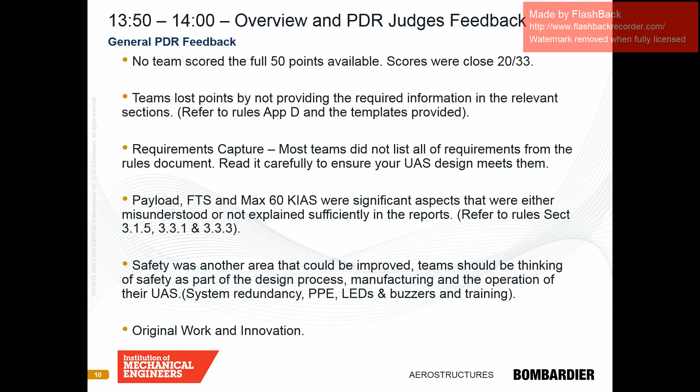Okay, that I think is everything on the PDR. I'll just go straight on to the CDR, and then we can do some Q&A after that. So, right, the CDR. Now this is a longer document.

As you will have heard this morning, those of you in Belfast, these reviews, this is what you should be doing, is the review. What you're trying to do is say, here's my set of requirements. I've now looked at these, and in your PDR, it was your first. Let's stop for a moment. Let's see, am I meeting the requirements? Is my design likely to be successful? And when you get to the critical design review, this is now where you're saying, right, I've now completed my design. I will check this against all the requirements, what I'm trying to achieve, and is that right? And if it's not, I'll go back and redesign that bit.

And only then, once I've satisfied myself that this review is complete, I can then go on into production and build the product. And so you need to think in that mindset. And what we as judges are trying to look at is that you have done just that. That's what we're interested in seeing. You've looked at the requirements, you've satisfied yourself this product is going to be fit for being built, and in our case, just doing a single fly-off event.

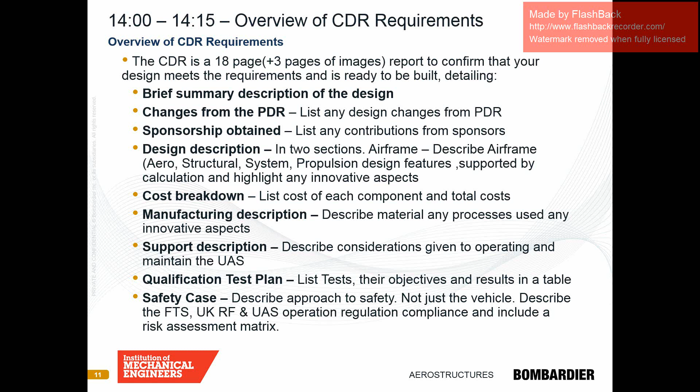I think, is that all we've got to see here? Oh yes, no, we've got one more slide. So, yes, just some points.

Please take note of the feedback we gave you on your PDR. It may be that we just misunderstood your PDR, and you might not like the feedback we gave you. If we misunderstood the PDR, well, write it more clearly this time. But please respond to what we wrote, because there was a reason for it. I know in one particular case we just misread the submission, and one team did challenge us on a statement, and we agreed. So again, in your CDR, when we give you feedback, don't be frightened. We're not going to penalise you if you challenge us. We're only human, and we don't always read properly either.

But on the feedback from the PDR, the bit at the bottom about corrective actions, you must address those. It may be that you're addressing it right, but you just haven't told us. Please make it absolutely clear in your CDR response about that.

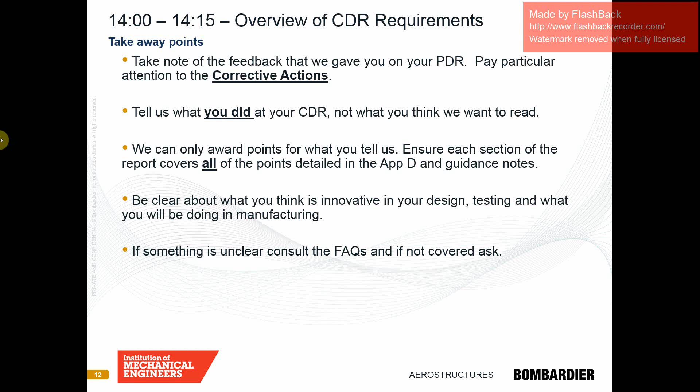So, right, that's, I think, the talk bit. Sorry, we rattled through that fairly quickly, but now we've got your opportunity for questions.

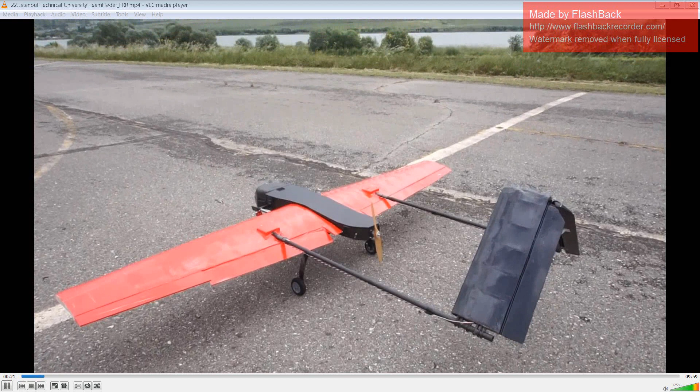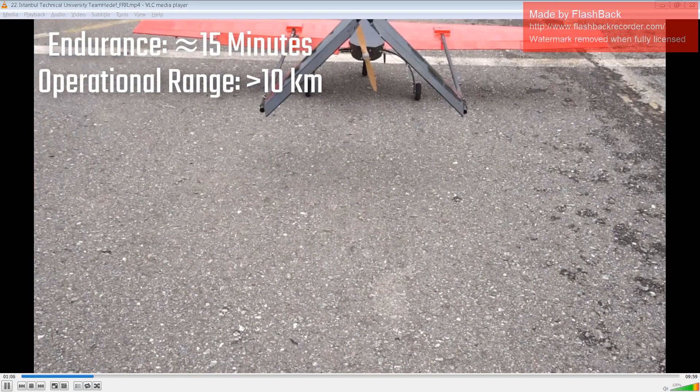Welcome to the Team Hedef 2018 Flight Readiness Review. In the following ten minutes, we will introduce our unmanned aircraft system named Tulpar. Team Hedef consists of Tier 1 engineering students from various disciplines such as aeronautics and astronautics, electronics and communication, and mechanical engineering. 15 new members joined the team this year. In 2017, Tulpar was designed from scratch, and this year detailed optimizations in the design are done. Tulpar can carry payloads up to 2 kilograms, while the maximum takeoff weight is kept within 6.9 kilograms. Tulpar is capable of autonomous flight up to 15 minutes with an operational range of more than 10 kilometers. In order to reduce the weight of the tail, a new tail without a horizontal tailplane is designed while providing stable flight in 3 directions. Fuselage size is optimized according to the required volume of the interior systems, and the narrowed fuselage provides less drag and weight. Nose design is enhanced to a smaller cross-section area for less drag, thanks to a smaller sized camera selection.

Flaps are used to keep the takeoff and landing distance less than 25 meters, and also touchdown speed of the aircraft is decreased.

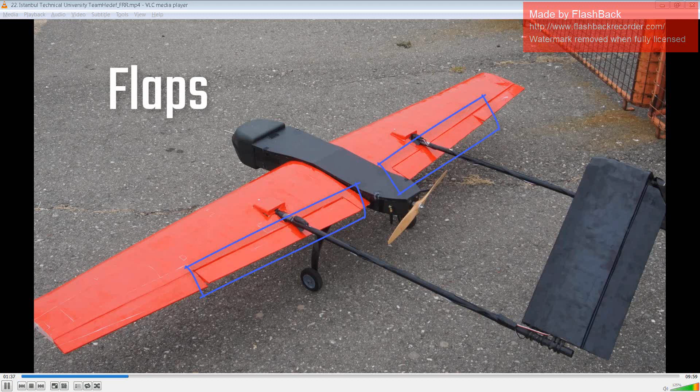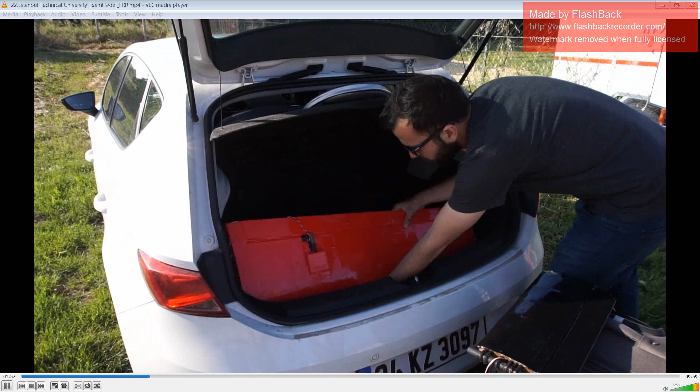Tulpar consists of 5 main components: wing set, inverted V-tail, tail connection booms, fuselage, and fuselage hatch. The design had to be detachable as far as transportation to competition field and test flight airfield is concerned, and also it is beneficial in terms of maintenance of the UAS. Tulpar subsystems are introduced in 3 sections.

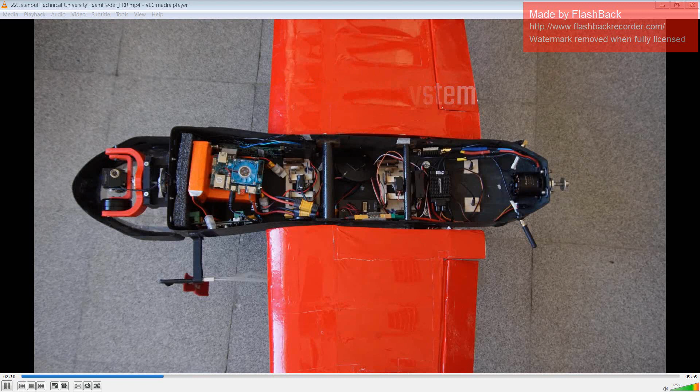First one is the flight control system. PDR autopilot module handles the autonomous operation and is programmed and tuned by Team Hedef. It receives ground control commands via the RFD telemetry link. In addition to onboard sensors in PDR, airspeed sensor, GPS, and LiDAR are used. The autonomous operation is managed at the ground control station with mission planner and also a custom graphic user interface developed by Team Hedef. The manual control of the UAS can be done using the 2.4 GHz radio receiver.

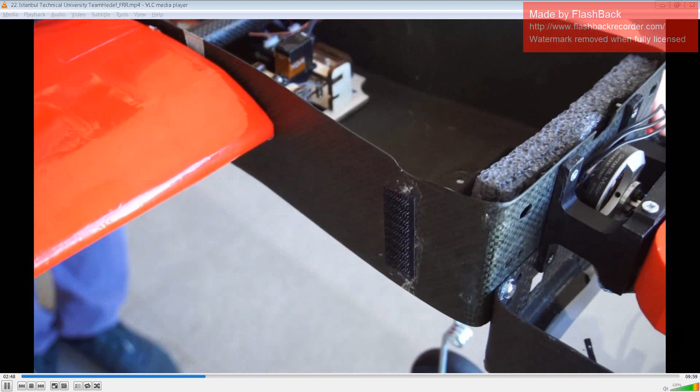Second subsystem is the payload release system. Payload releasing mechanism consists of 2 servos and each payload unit is secured with a metal rod. Payloads are inserted in a package consisting of dampening material to ensure that they are delivered to the location without any leakage. The final one is the imagery system.

The imagery system is positioned in the nose section for a maximum point of view for the reconnaissance mission. Instead of last year's Sony a6000 camera, a new USB 3.0 high-resolution camera developed by the imaging source is selected due to its reduced size and weight, while providing high-resolution images from a flight altitude of 75 meters. A custom-designed gimbal is used to stabilize the camera in 2 axes with brushless DC motors. Onboard computer is responsible for onboard image processing, which provides short reporting time to the ground station. Bullet M5 connects the UAS to the ground station via a Wi-Fi link at 5 GHz.

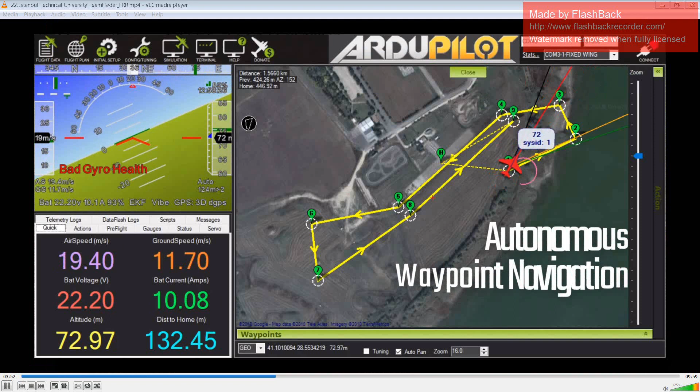Autonomous takeoff: high confidence. Autonomous landing: medium confidence. Autonomous waypoint navigation: high confidence. Payload delivery: high confidence. Reconnaissance: high confidence. Geolocation: medium confidence.

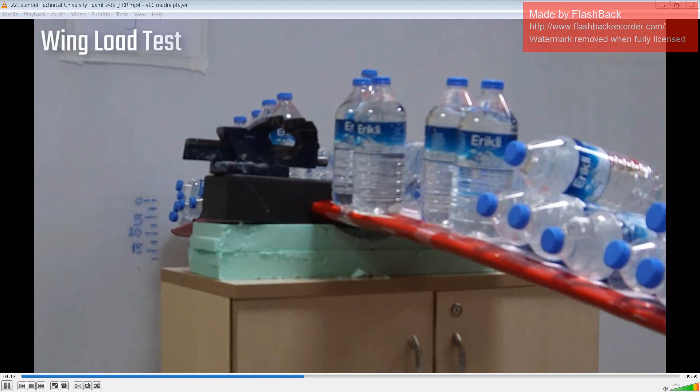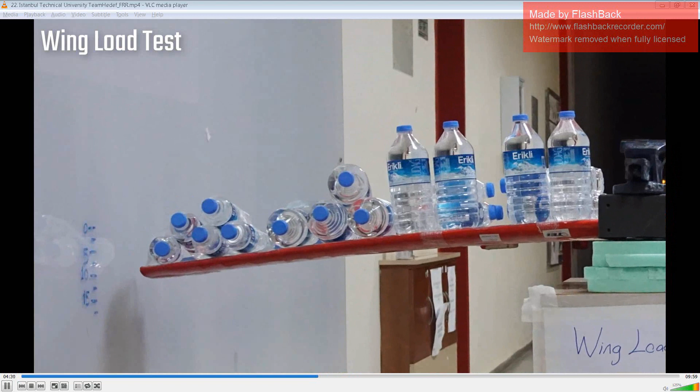Numerical analysis and physical tests were executed to make sure that wings are reliable in flight. Finite element analysis was executed with the loads obtained from vortex lattice method, and wing load test was executed to simulate the forces on the wings during flight and maneuvering. Payloads were placed on the wings according to the distribution obtained from vortex lattice with a maximum load of 4G.

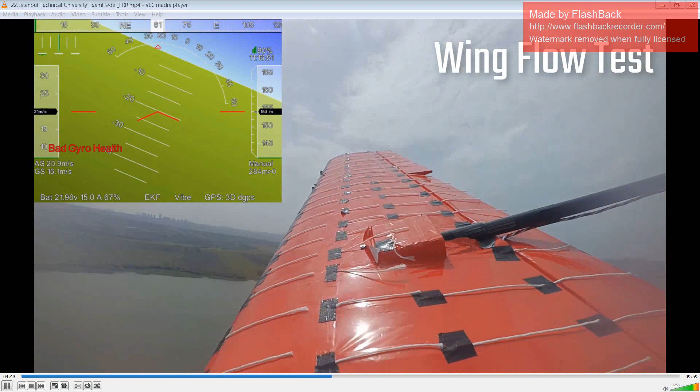We carried out wing flow tests in order to check the accuracy of the lift calculations in XFLR5. The yarns were arranged to be parallel to the direction of the flow on the wing. At a 25-degree angle of attack, we have seen that the UAS entered the stall state.

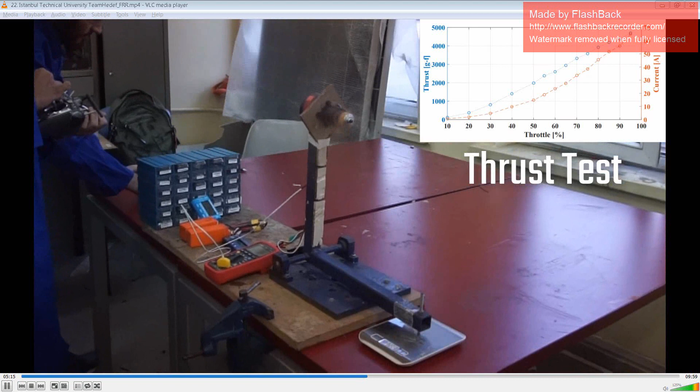The propulsion system is chosen to be brushless DC motor with 6S lithium polymer batteries. SunnySky X3525 motor is selected and its static thrust test is conducted on ground. The motor has sufficient and efficient performance with a 13 by 6 propeller that provides a 0.6 thrust to weight ratio.

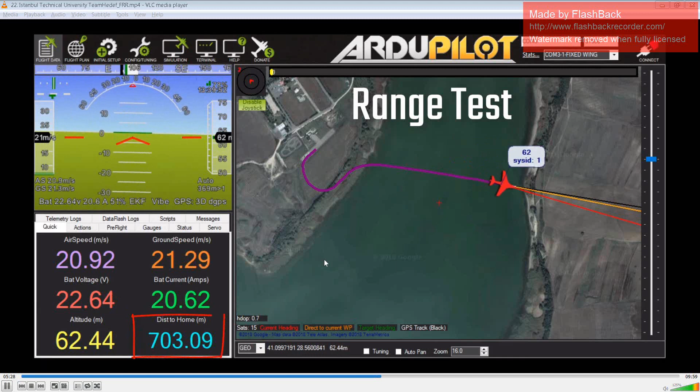To ensure that Toolbar has consistent ground control station link in a safe range, we conducted a range test where the UAS is flown 1 km distance. The signal rate is lowered to 73% without any disconnection issue.

Takeoff speed of Toolbar was set to 14 meters per second, which is 1.3 times of stall speed, to provide safe maneuver. Takeoff distance is kept less than 15 meters due to high thrust to weight ratio. Since the landing maneuver is risky, in addition to onboard barometer sensor PDR 2.1, LiDAR is used to increase redundancy and accuracy of altitude determination.

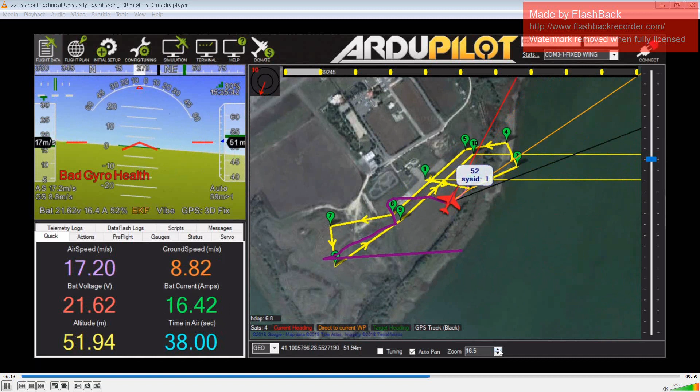ArduPilot software is used for the autonomous operations. Firstly, the PID parameters are tuned on the ground by investigating the test flight log data, then the detailed tuning and verification is done via telemetry data during the flight. After these tuning and validation, Team Hedef is confident to have more than 90% of waypoint accuracy, and the missions are planned using a custom interface developed based on mission requirements.

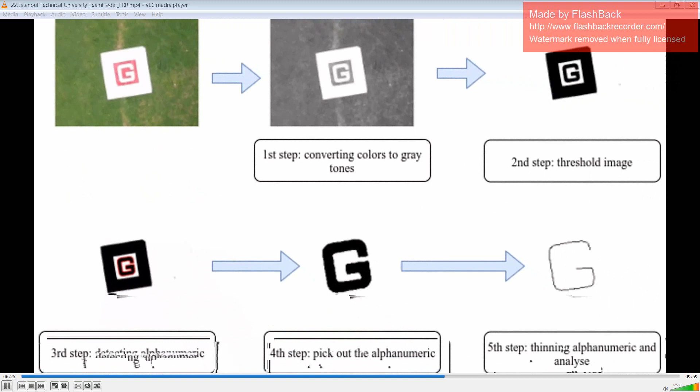We performed image process missions under different light conditions with various letters to evaluate the performance of the image processing algorithm. Identification of several alphanumerics was problematic, so the algorithm was improved after test flights, and also the sunlight effects are eliminated by adaptive ISO gain, exposure, and brightness settings via OBC during flight. After all these improvements, all of the alphanumerics are read with a rate of 70% accuracy, and the geolocation error is minimized down to 8 meters.

The release mechanism mounted in the toolbar was tested during test flights. We checked the flight logs for release triggering time and improved the linearized ballistic algorithm, determined analytically by comparing the desired and actual payload drop locations. The team managed to deliver the payload with less than 5 meters error. Also, we have seen that our coverages for the flour packages can absorb the impact shock even on the asphalt concrete surface.

Safety is the most prior issue for the team, and we paid attention to apply safety procedures in each step of the design, production, and test processes.

Yusuf Demirol has been the safety pilot of Team Hedef since the foundation of the team in 2014. He has the required equivalent of BMFA A qualification, and his BMFA membership covers the required insurance for the competition. Including previous UAS flights, he has been the safety pilot of the UAS for more than 80 flights successfully.

The team uses an ultrabook with sunlight readable screen for the ground control station, equipped with RFD telemetry link during the test flights. The UAS is equipped with multiple redundancies of communication channels with the ground control station in order to guarantee uninterrupted monitoring and data relay.

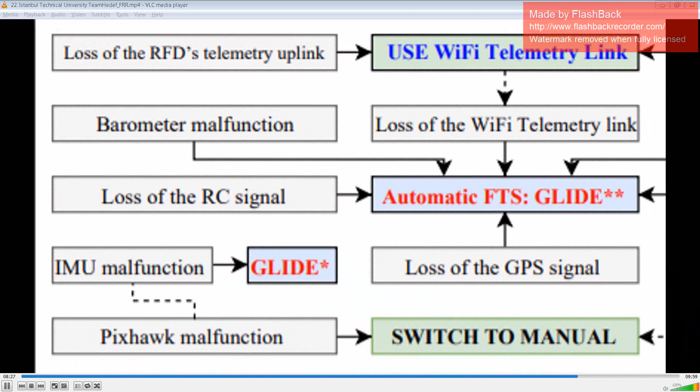A detected loss of RC transmitter signal will trigger the termination of the flight. For flight safety, the automatic flight termination system will kick in the event of a possible power loss, geofence breach, avionics malfunction, or any disruption of the communication systems.

The automatic flight termination is done by moving the control surfaces to preset positions in order to achieve a passive gliding maneuver. Barometer, IMU, or GPS failures trigger the flight termination system for a passive gliding maneuver.

If a visual assessment from the ground indicates a malfunction in the operation, the safety pilot can take control of the UAS to trigger flight termination. The manual flight termination sequence is the active gliding with IMU instruments. A buddy box transmitter is set and ready for the competition safety pilot.

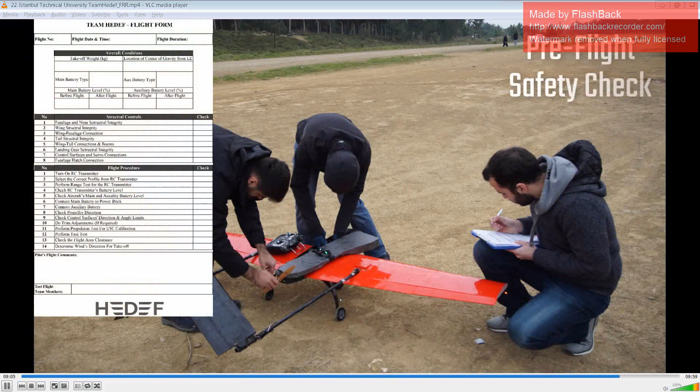Before every flight, the team follows the safety checklist procedure carefully, and comments about the flight are recorded in the test flight logbook.

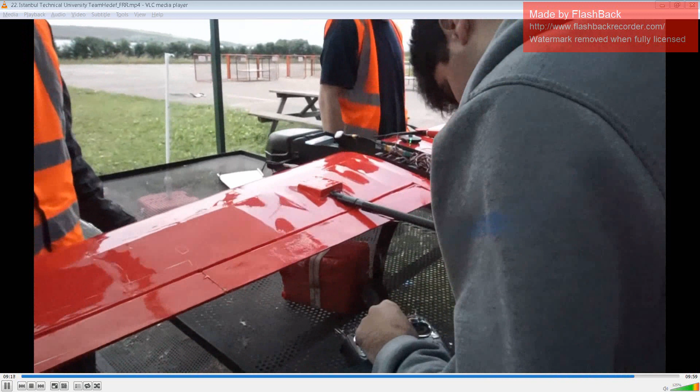The team conducted more than 30 test flights with toolbar. During the flight tests, crew members are trained for operational excellence at the field, autonomous operations are tested, and the reliability of the system is examined in the air.

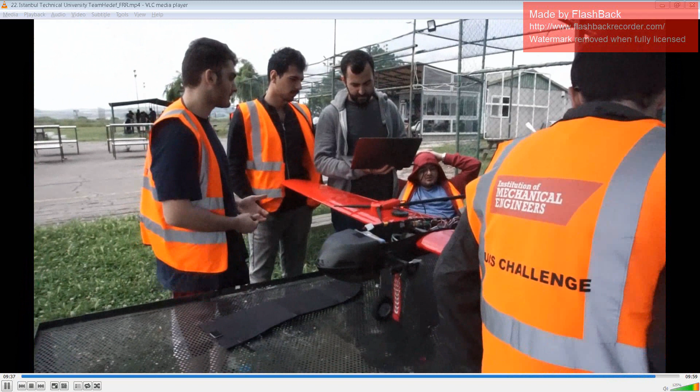As a result, the team is confident that all the systems are well integrated and working well, and aims to be in the top 3 in the UAS Challenge 2018.

Right, we thought it worth showing you that. Now, clearly that team had somebody who was pretty adept at doing videos, but we're not expecting high quality videos from everyone—it just gives you a feel.

The important message to take home is that they used the whole 10 minutes. They were the only team last year that got anywhere close to using the full 10 minutes. But as you saw, they used it effectively, and they showed each of the stages of flight that we wanted to see. They showed us that they'd done some testing on their way to flying, and they addressed things like the flight termination system.

So on one hand, we're sort of discouraging you because it's quite hard to produce something as well put together as that, particularly if you haven't got anyone in the team who would know where to start to produce a video like that. But at least that's the sort of thing that's good to see in some form or another. So don't feel it has to be as professional as that, but just think about the sort of thing.

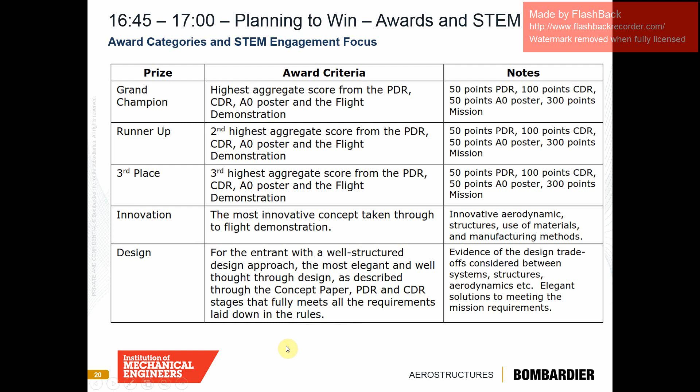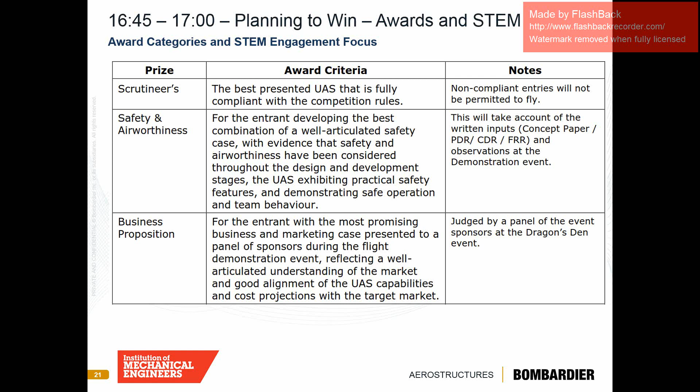It's mainly to the sponsors of the events. The companies that are sponsoring will be judging this short pitch. I think it's only 5 minutes you're required to do it, as it says in the rules, and then they will ask you various questions. What it says here is that you've understood the market you're aiming for, and that yours is going to be the most competitive design to meet that customer requirement. And clearly, this is where cost comes in, you may want to say why it's affordable for the task you've come up with.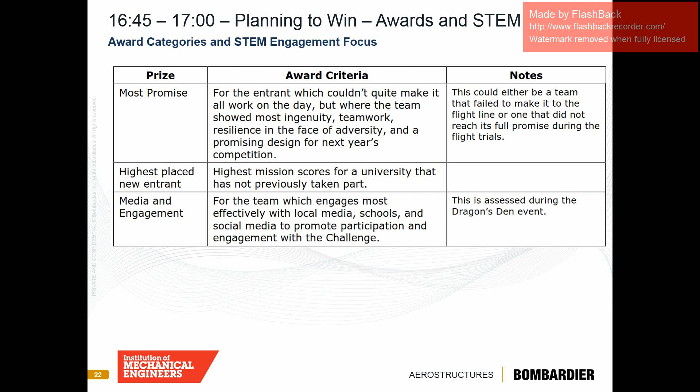Yes, so do you want to say something about STEM? From the STEM aspect, we will have two groups of schools there, both on the Monday and the Tuesday. I believe on the first day it's primary school, second day it's secondary school, or possibly the other way around. There will be a host of activities that we're putting on for them that are appropriate for the age, engineering and science-based.

But certainly when the school children come around, they will get a tour of the hangar. You will have an opportunity to showcase the system you've developed and the processes you followed and all the interesting stuff you've been doing throughout the year. And we really do promote that. I know Pakistan NUST were very, very thorough with the kids, and they gave them a really good, essentially full aerodynamics lecture, tailored appropriately for secondary school children.

But yeah, obviously be mindful when the school children are around, please watch your language. Although a lot of you are non-native speakers and don't have a huge amount of English, we just want to make sure they enjoy themselves and that it's appropriate. Also be mindful when maintaining your aircraft that there's nobody around that could cause a hazard, I'll go back to safety there. But other than that, obviously engage with everybody and showcase all the great work you've been doing throughout the year.